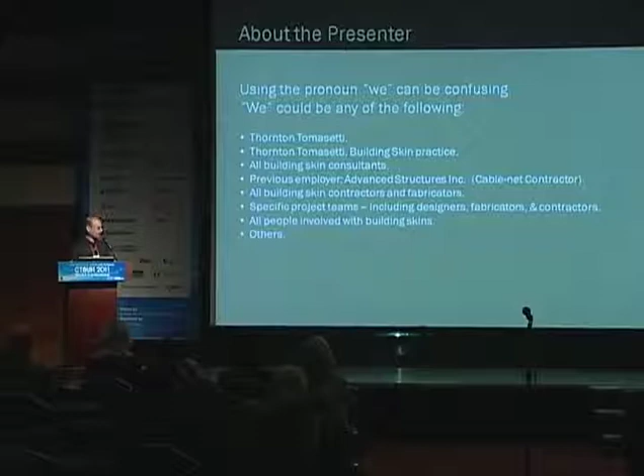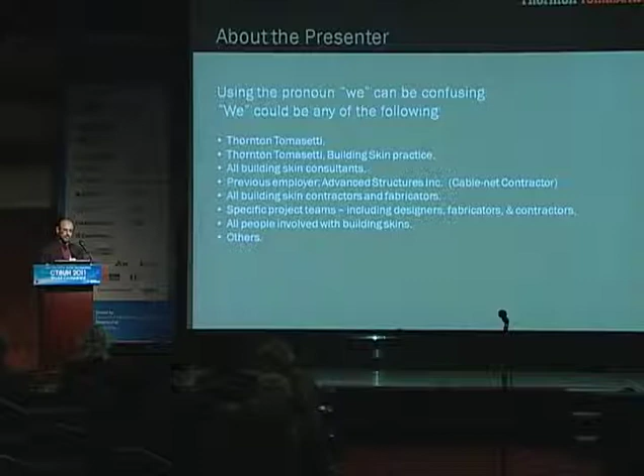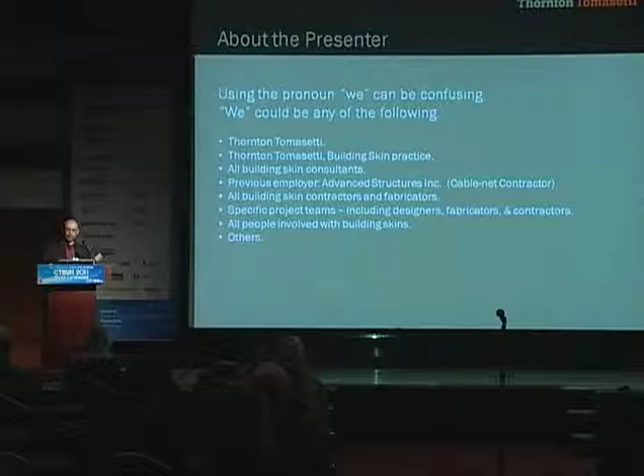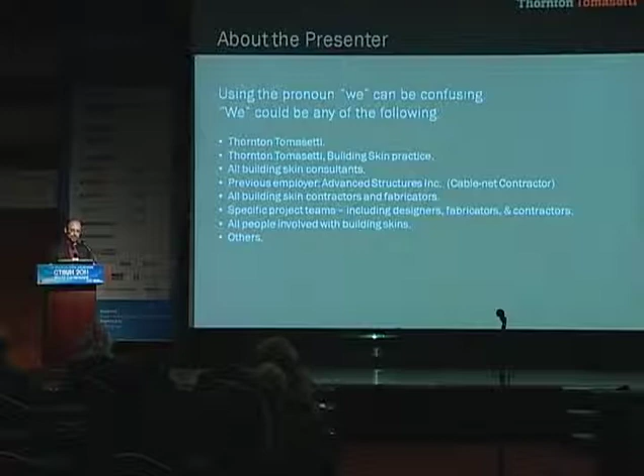Whenever I present, I have a problem with the pronoun 'we.' I say we all the time, but we could be anything. It could be Thornton Tomasetti, as I'm an employee of TT now. It could be the building skin practice within Thornton Tomasetti. It could be my previous employer, ASI, which was a contractor, because much of what I show is from my work as a contractor, especially when I talk about cable nets. Or it could be the specific project teams. If I'm talking about the Loyola project, I could be talking about SCB architects together with the consultants and myself. Or it could just be talking about the building industry as far as the consulting industry for facades. It could be any of those. So I try to be specific when I can, but it's a big group, and I identify with all of those groups.

This is not specifically about Thornton Tomasetti projects. This is about the topic of building skins, which are supported by cables. So I'll be showing jobs that I completed while I was with ASI as a design-build contractor. The 3 buildings are the Qualcomm building by Delawie Wilkes Rodrigues, and Barker; the museum by Polshek; and finally the Loyola University job by Solomon, Cordwell, and Buenz.

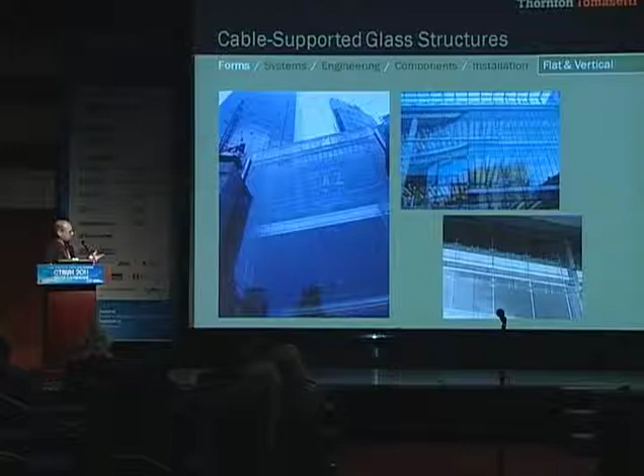Okay, so forms that are available. You can do them flat and vertical, it's nice and simple. Or you can do them flat and sloped, but flat and sloped you would think is the same, but it's not. I'm not used to using a microphone because I need to stand in front of you, so I'm going to shout a little bit.

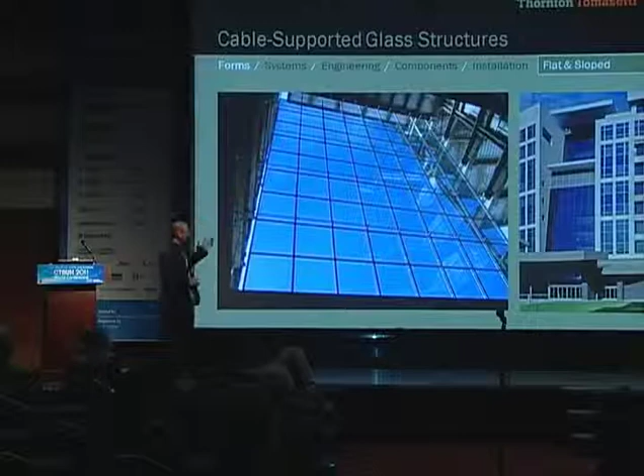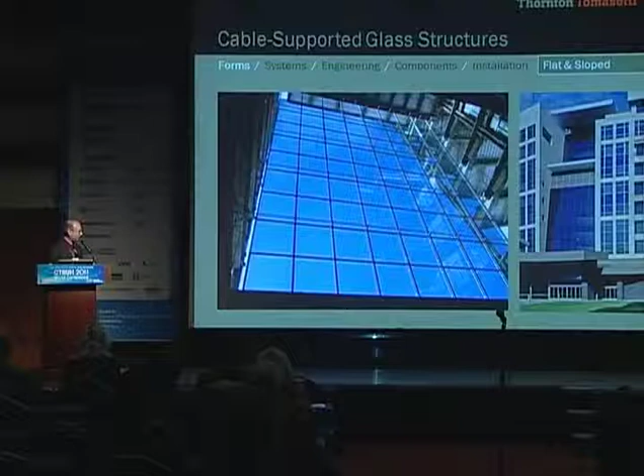When you have a flat building, a flat facade hung with cables, it just wants to hang straight. But as soon as you want to slope it and lean it back, now it wants to hang like a wet towel, so the middle wants to sag. So when you work with these kind of systems, you have to engineer and detail in a series of props so that all of the points actually push the glass out into a spherical pattern. But when you add the glass weight on, it actually deflects back into being a flat form again. So this is a lot more complicated than it looks.

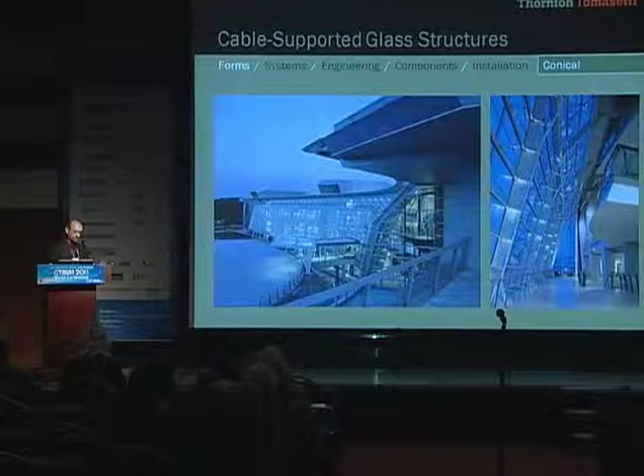You can also do cylindrical shapes, whether you're putting the framing to the inside or to the outside. Again, you can do conical shapes, which are sloped cylinders, and again you have the same problem of the wet towel, so you have to prop everything forward again. And then you can do dome shapes, hemispheres. Hemispheres aren't always hemispheres—sometimes spherical forms are just kind of a lens, which may just be the top of a hemisphere.

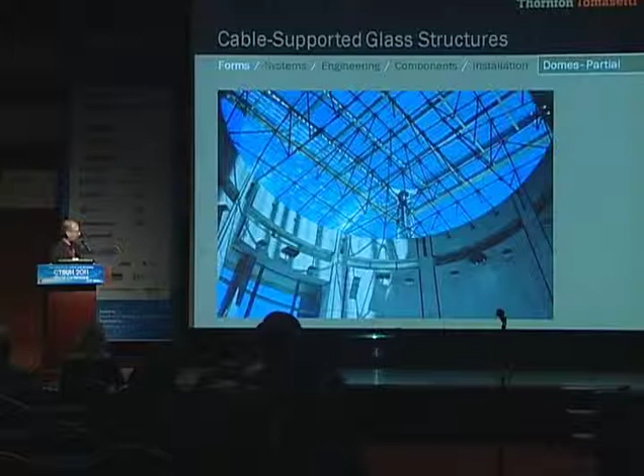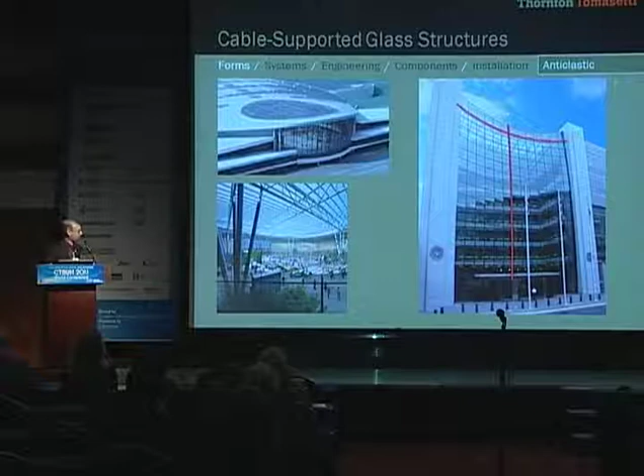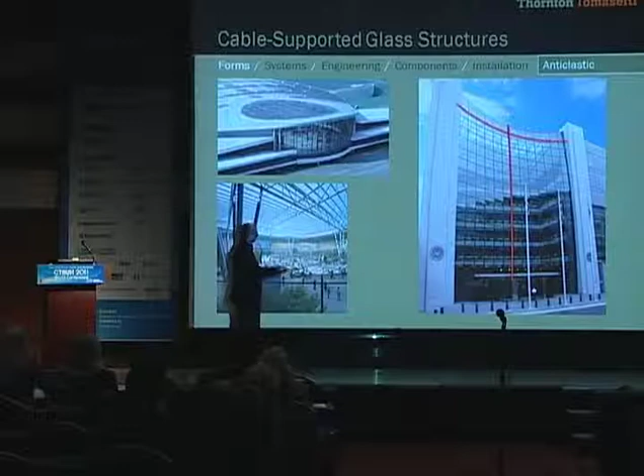Lastly, we have something called anti-clastic. Anti-clastic is not the opposite of clastic - it's the opposite of something called synclastic. What it means is that the curves that generate the form have their radius on opposing sides of the form. So if we look at the horizontal curve here, it's concave, facing out towards all of you. But the vertical curve is convex, facing back into the building. So the form is generated by two sets of curves, but from opposing sides of the form.

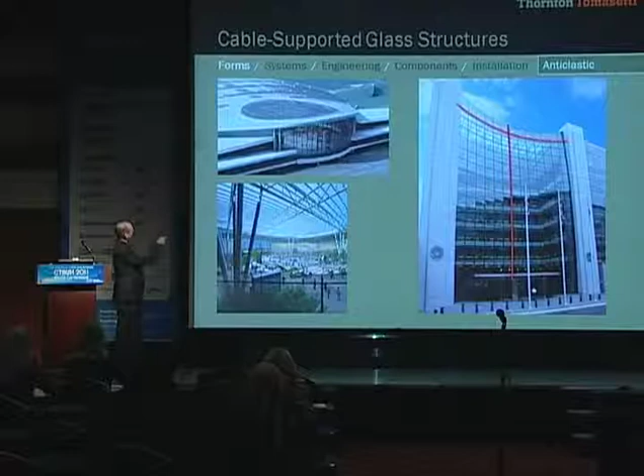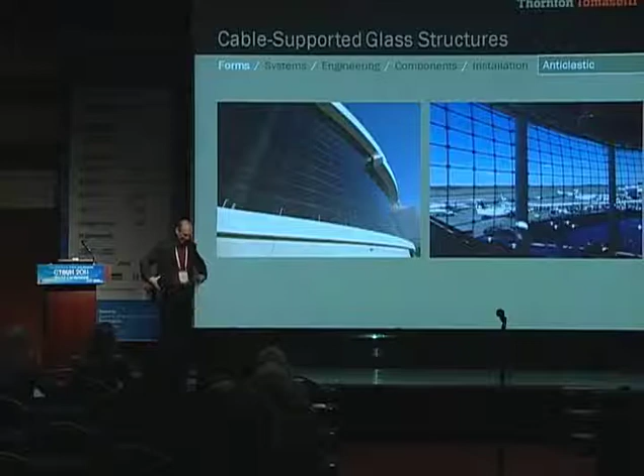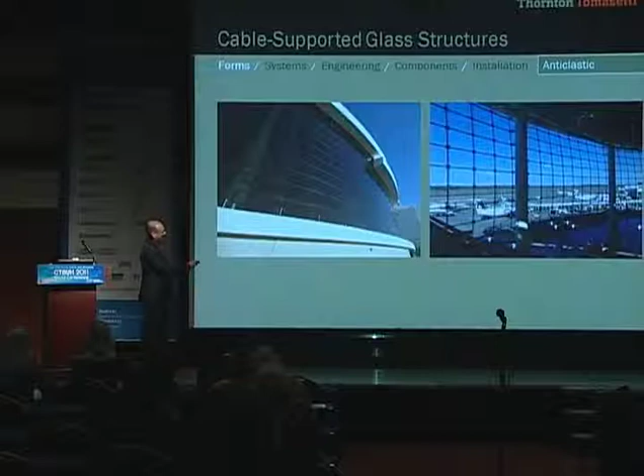This is a fantastic example, SeaTac Airport, of an anti-clastic wall. It's basically just a cylinder form, with a series of cables running horizontally. When you pull those horizontal cables, it's like putting on a girdle - you start vertical and flat, but when you pull them tight, it pulls in the middle, creating this anti-clastic form. So this is generated by two cables pulling against each other. The horizontal cables pull around the curved building, and the vertical cables want to take a straight line, but because of the horizontal cables, they actually pull in.

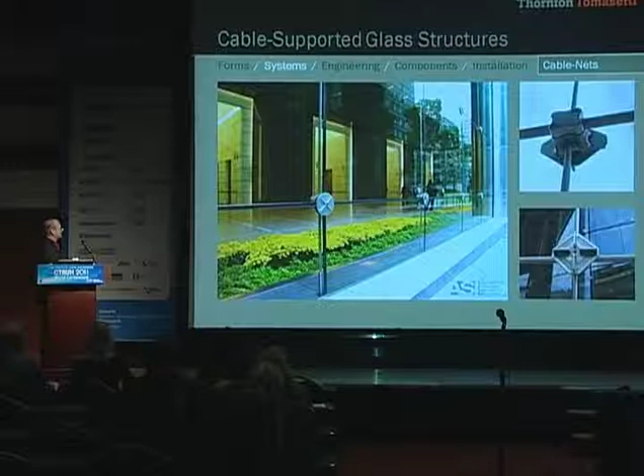Okay, so now let's talk about systems. We have cable nets, and this is actually a cable net - I only refer to these as cable nets. This means we've got two sets of cables, one running horizontal, one running vertical. It's a true net, if you will.

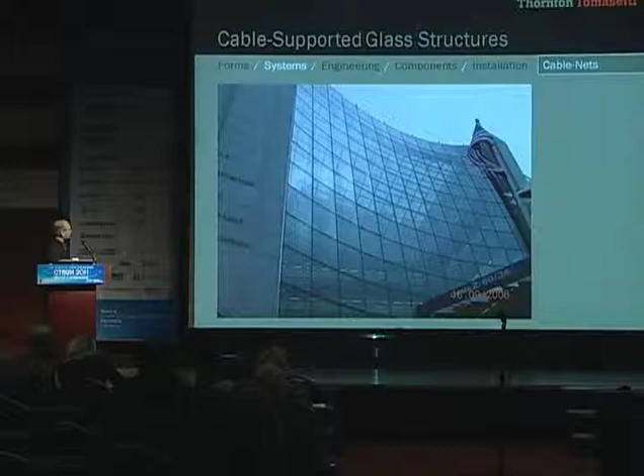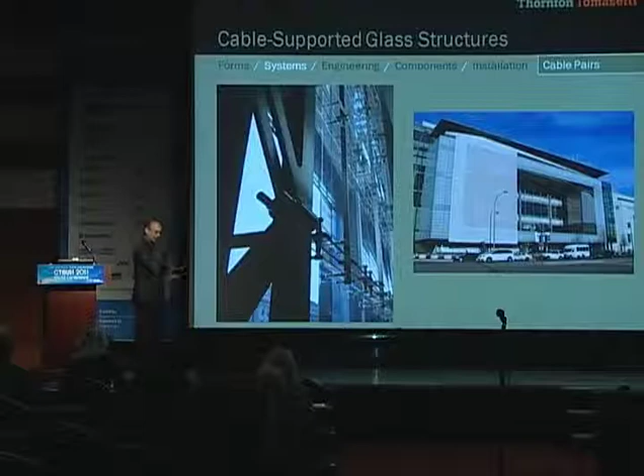You can do anti-clastic forms with cable nets. This has two cables running both directions - this is pairs of cables, though, so I don't call this a cable net. You can see pairs of cables running horizontally, and then stainless steel hanger bars which take the dead load of the system. It's very similar to a cable net, because if it was one, we'd have a vertical cable and a horizontal one. But since we lost that vertical cable acting in tension, we had to turn it horizontal and add it here, because we still have the same structural requirements - we still need the same amount of tension in the system.

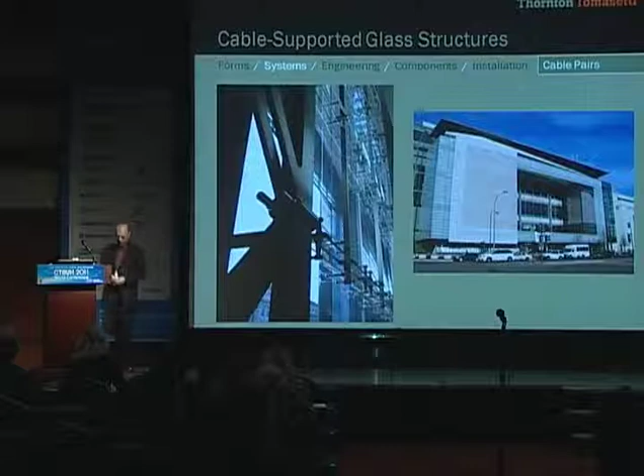Another example of horizontal cable pairs, again with a steel system being the suspension or support for dead load.

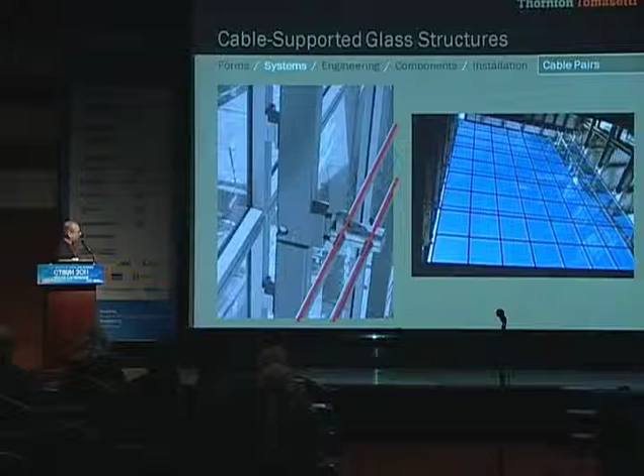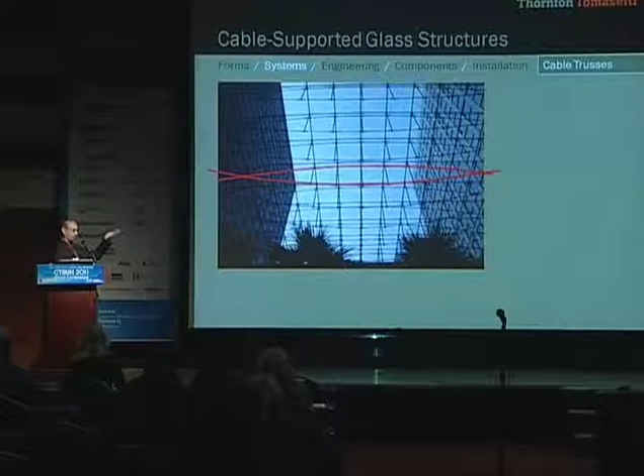So the next system would be cable trusses. Cable trusses have cables which basically oppose each other. This is very similar to the anti-clastic cable net, where you've got one set of cables pulling down on the skylight, and another set pulling up on the skylight. They resist each other, and they resist positive and negative wind loads.

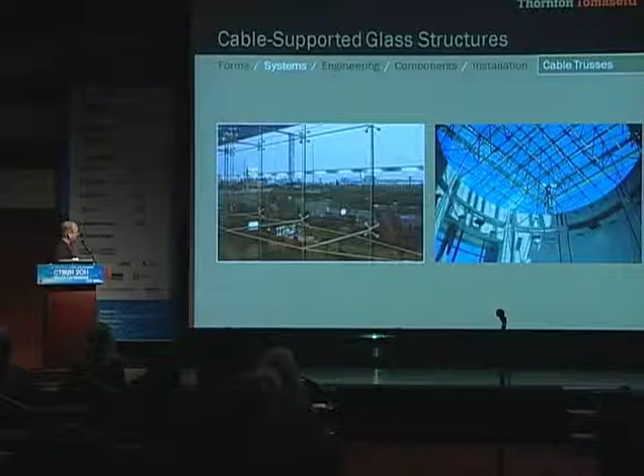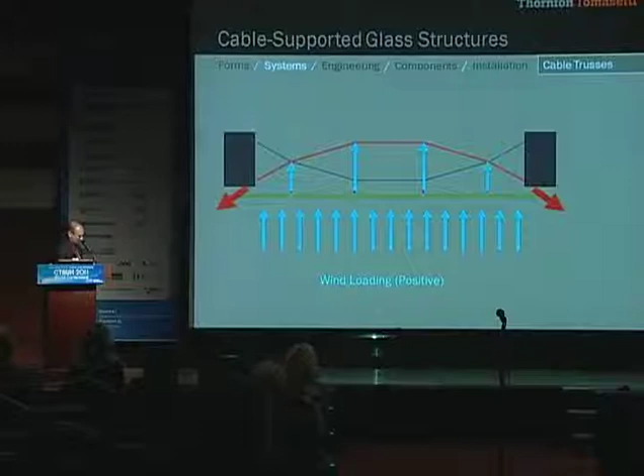These are more cable trusses. There you can see the horizontal cable truss, and these are the struts used to keep those cables opposing each other. So this is a cable truss in plan view, maybe. The way they work is you tension the ends, and that puts the cables in tension - they remain pre-tensioned like that for the life of the job. Now we apply wind load, and it transfers through the front struts, applying it to the back cable. But if we apply negative wind load, it works the opposite - now it's pulling on the back cable or front cable, depending how you look at it.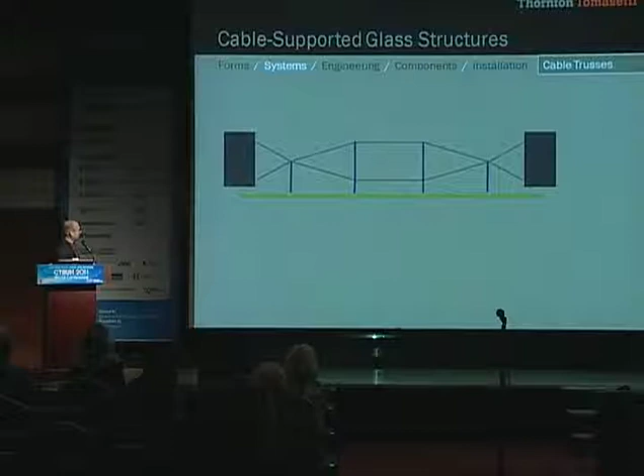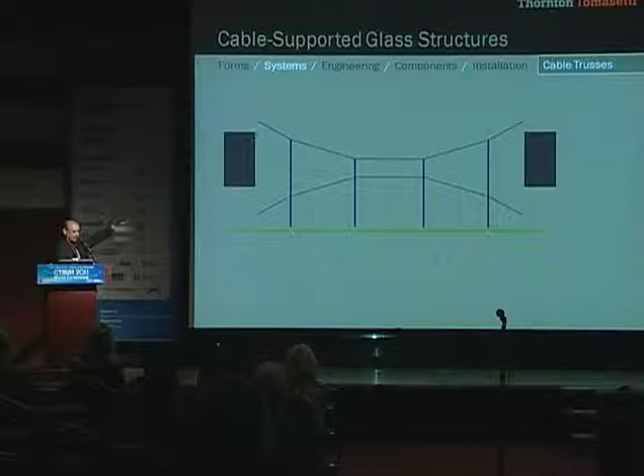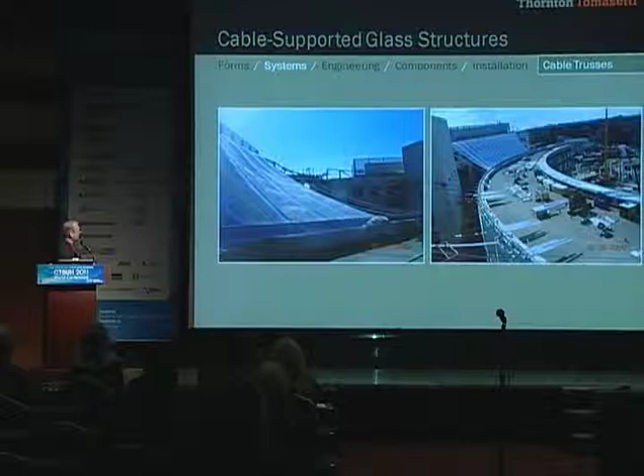As an option, you can pull those two cables apart - they're still the same diagram. Or you can move them to the back, and again it's still the same diagram - you've just moved the positions of the cables. The loading still works the same. Except here, I'm now attached to the columns, so it's an obvious problem, right? This is a job where we're supporting ETFE with cables.

So what I've drawn in, you can see the cables running back here. They look like they're just sagging from self-weight, but actually what you don't see is there's another cable below them that's pulling the system down and keeping it tight and rigid.

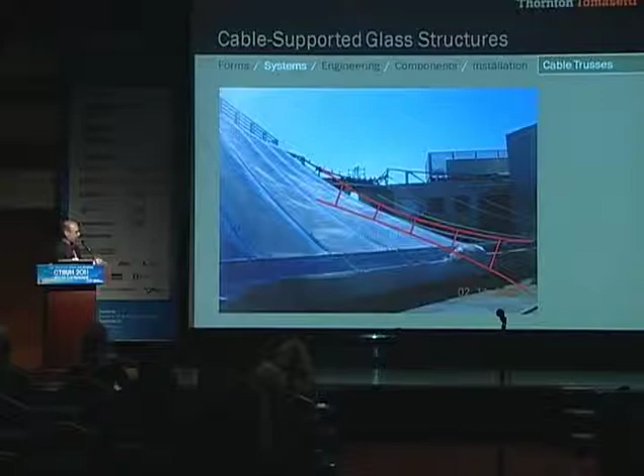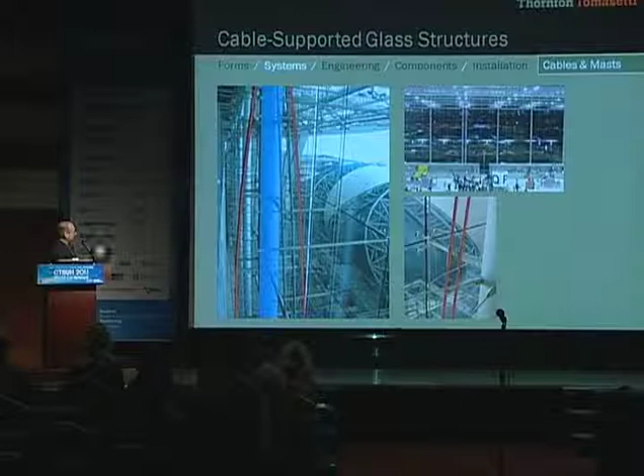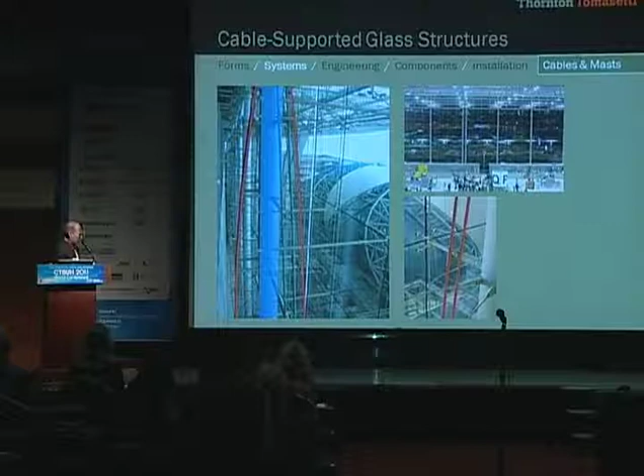This is Bangkok International Airport. This is a mast system where we basically have a compression mast which goes down the middle of the system, and then we have a cable in the front and a cable in the back, doing the same thing as the cable truss, except instead of pulling on the structure itself - the columns at each end - we're putting all this load into this compression strut. So we're isolating all of the cable loads to go up to the top and then come all the way back down through the compression strut again. It's kind of a self-contained tension system. But if you look carefully, we also have tension trusses in here as well, going side to side.

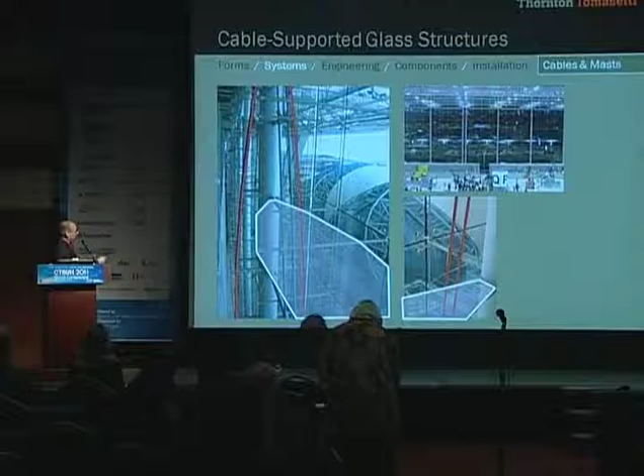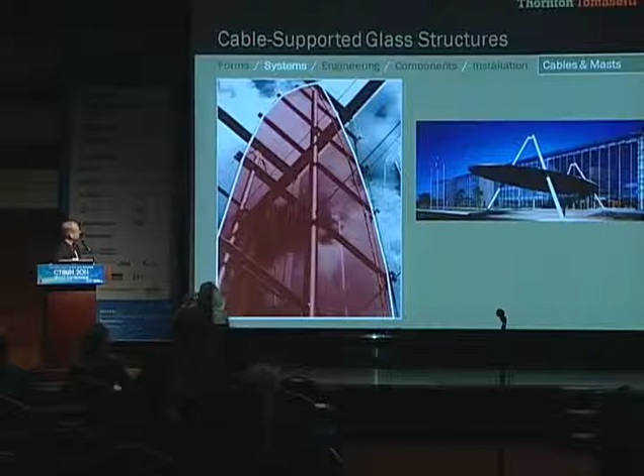This was a hybrid system I developed for a project in California. Basically, we have a series of vertical masts, but they only have the rear cable. So what do we do about the front cable that's missing? There should be a front cable putting load from the outside to keep the system balanced.

Since it's already a curved facade, we use the horizontal cables that run directly behind the glass and tension them from each end. That helps pull in the facade, whereas the vertical cables are pushing out. So it's a hybrid system, with the horizontal cables being activated to resist the vertical cables.

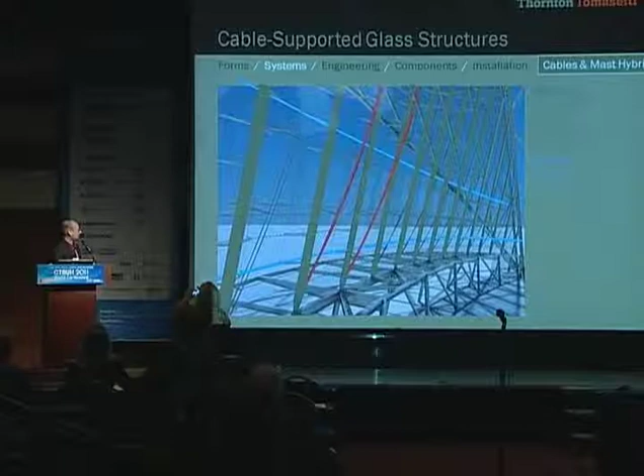Okay, let's talk about engineering and some of the boundary conditions we need. There's a lot of load in these, and I meant to print myself a cheat sheet so I could tell you how much load, because I don't keep this in my head.

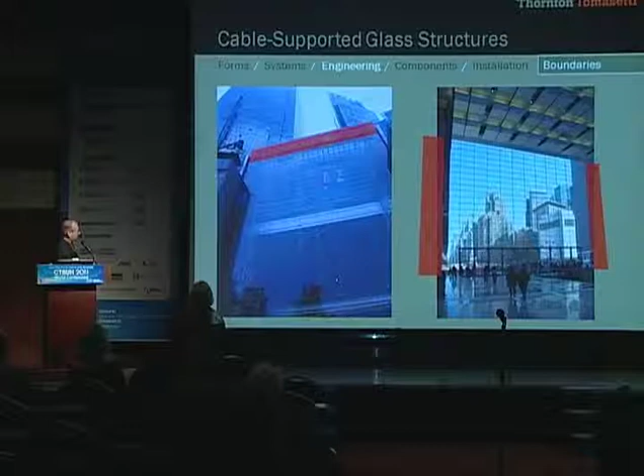Maybe 30,000 pounds would be common to have in these cables for pretension. So what do we need? You need a very big truss up here at the top to take the tension load of these vertical cables, and you also need concrete piers or concrete decks on the left and right to take the horizontal loads. This is that vertical truss at the top, which isn't doing anything other than just taking those cable loads.

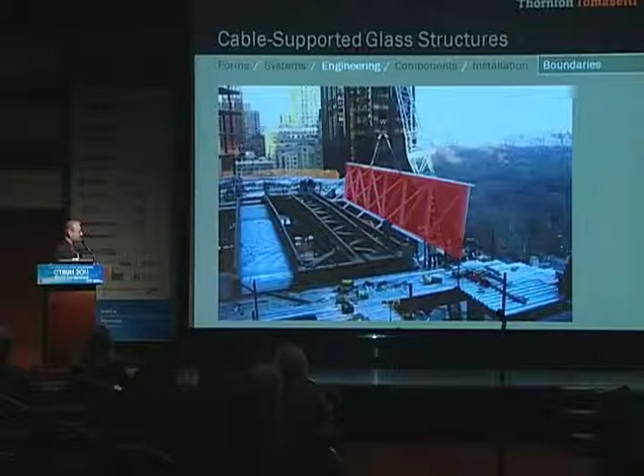Frequently we're asked to do cable structures where there's really no provision of structure. And we have to tell the designers or the clients, look, I'm sorry, the way the building is right now, you really don't have the capacity to take the cable loads.

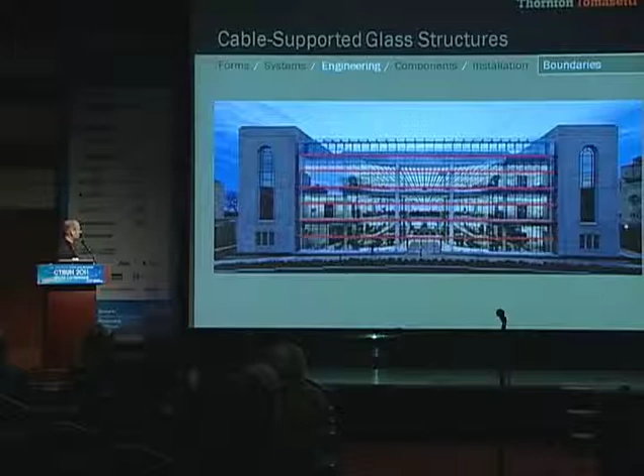This is one of the three jobs that I actually built as a contractor. This is where the horizontal cables are located, and that's what's resisting the cable loads. We have massive concrete piers at the left and right ends of the building, giant bookends.

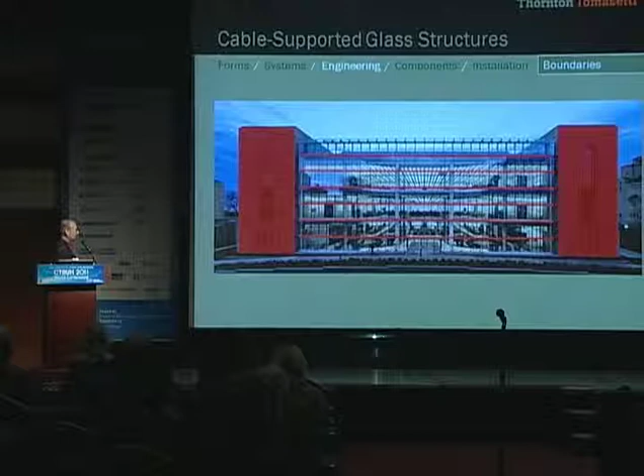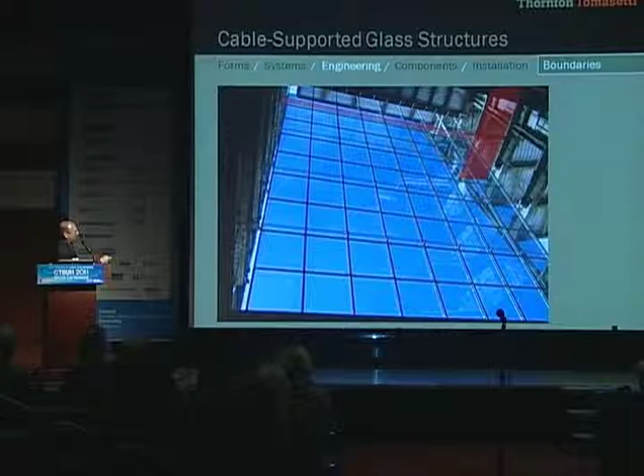This top set of cables comes all the way across and ties right into a floor deck. If you look carefully, you can see the drag beam, which is actually pulling this force and dispersing it back into the building. If we keep going floor by floor, you realize all of the cables are tied into the floor decks, and the floor decks act as diaphragms to carry these loads back into the building.

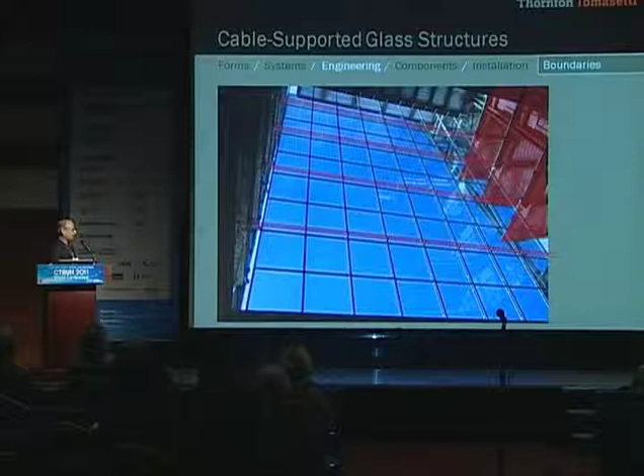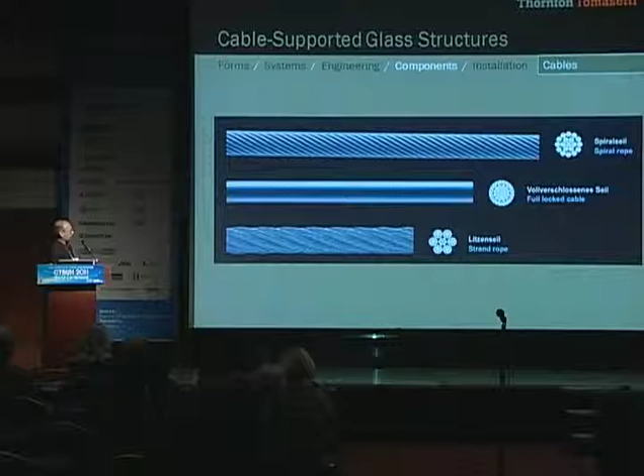Mostly for the jobs that we do, we're either using strand or the fully locked cable. Fully locked cable is a lot more expensive, so we tend not to use that. So usually we're doing this - this is what it looks like when it's in a box. It looks like spaghetti laying in a box.

If we back up for a second, this end fitting here is called a swaged fitting. There's a series of tapped threads here that are cut, and then we've got the basic swage, which this rope or strand cable comes inside.

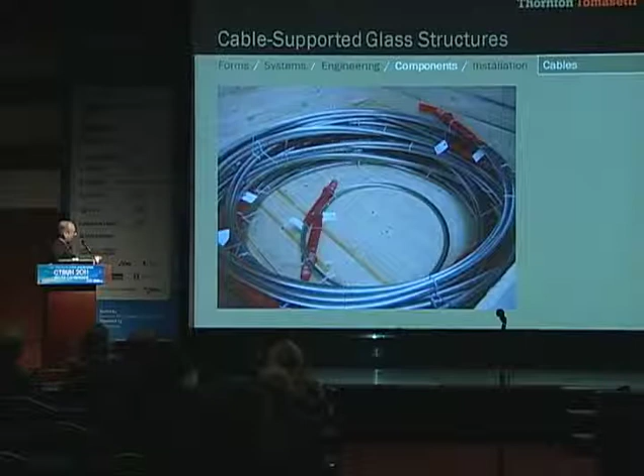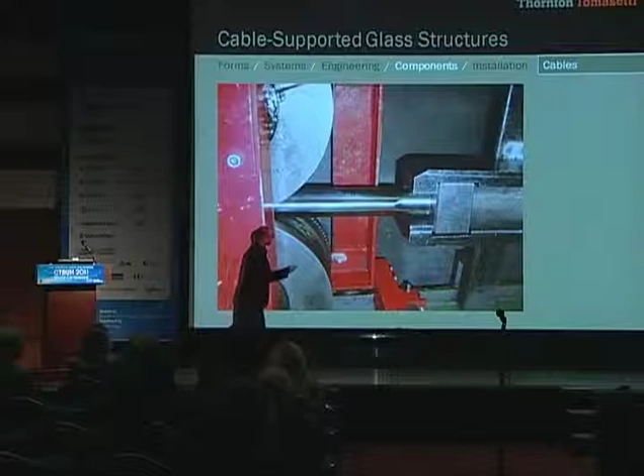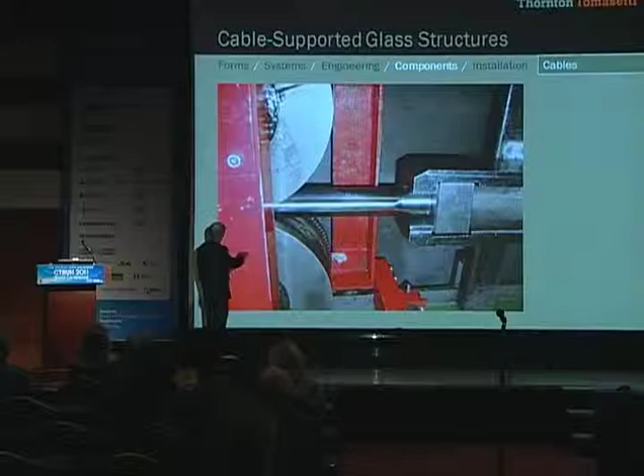So the way this works is the threaded portion is here. It's tapped into a solid block, and from the left side that we can't see over here, we've got the cable, and we bring this cable and we drop it into this hollow sleeve, if you will. But then this wheel here and this wheel down below, these are very large hydraulic rams, which basically press together on this hollow tube, and then by grabbing it here, they actually pull the hollow tube through the rollers.

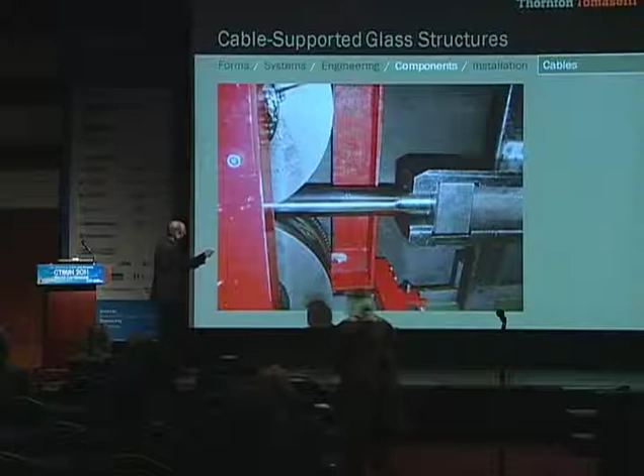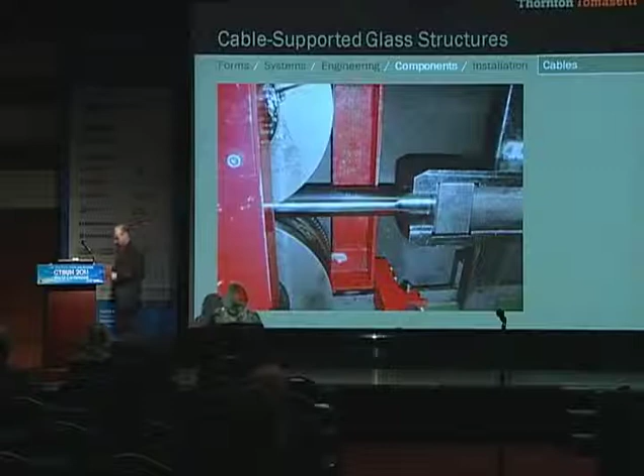And you can see the deformation of the stainless steel sleeve here. So basically what's happening is they're just taking this hollow sleeve and squeezing it onto the strand rope. That's important from an engineering standpoint, to know that you're dealing with something that's been squeezed onto the rope, because basically the failure mechanism for those kind of fittings means that the rope will actually pull out of that sleeve before the rope itself will fail. So there's always a 0.9 factor whenever you're using those kind of end fittings. Those are called swage fittings.

So they differ from something like a spelter socket. A spelter socket is shaped like a funnel. You put the cable through, then you pull it apart, and then you put grout inside, and then it cannot pull back through the funnel-shaped fitting.

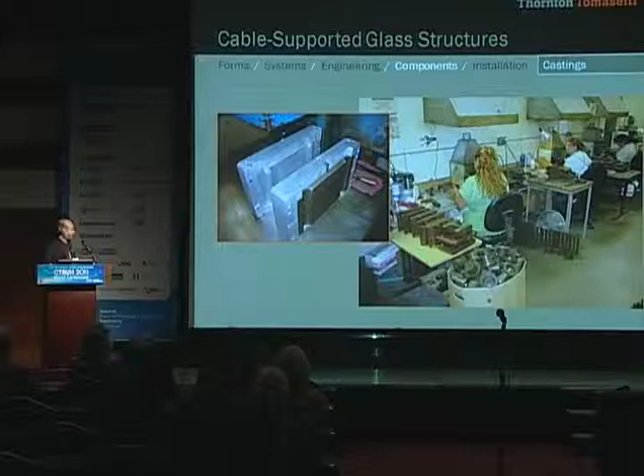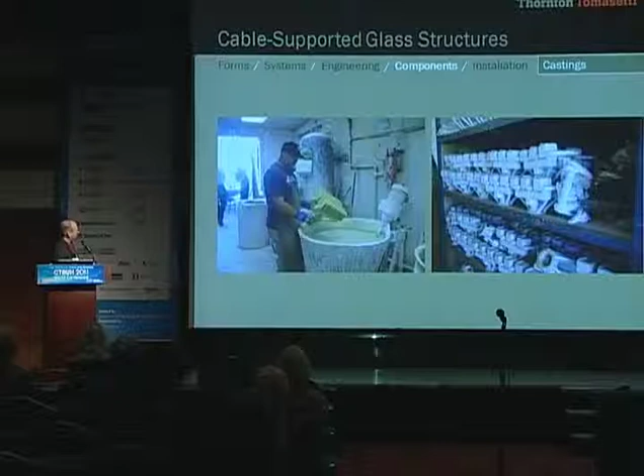Whenever we do cable systems, we almost always have castings. These are called investment castings. Basically what we do is we have a die form that we inject wax into, and for every casting that we need on the job, we have to make one piece of wax. So what we've made here is a clamp. Using these two die forms together, we injected this wax in there to create this one clamp shape. But you can see this little nib here. This is where the wax was coming in.

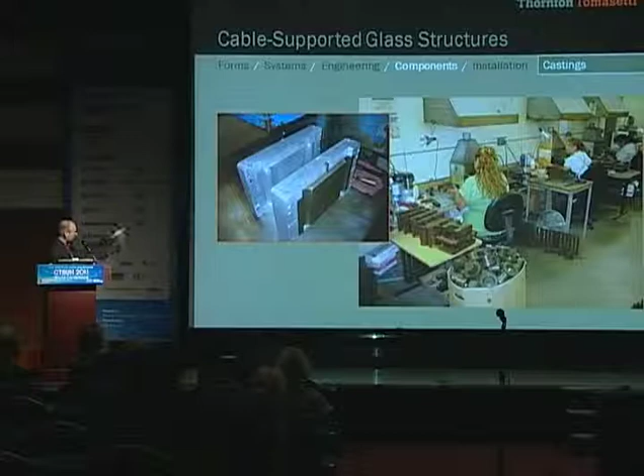So now all of these ladies here are basically taking this piece, cutting off the injection point, and then they're actually tapping on these other pieces which create the flow tunnels for the stainless steel to enter into the hollow void later. So we start with a solid wax, and then they dip that solid wax into powder, which is basically ceramic dust. And you can see here, these are castings that have been coated with the powder dust. They've been coated many, many times. They have a thick layer on them.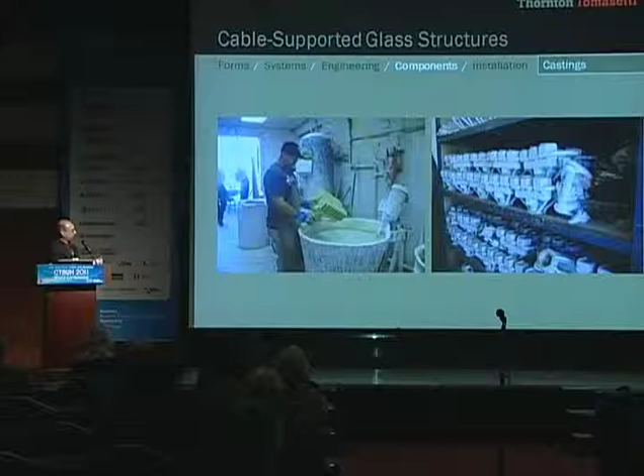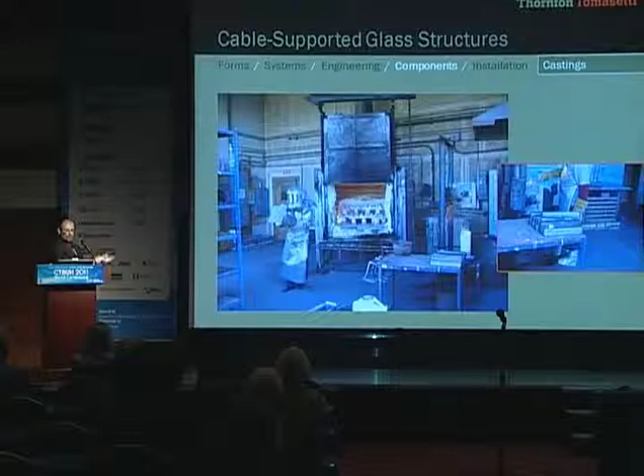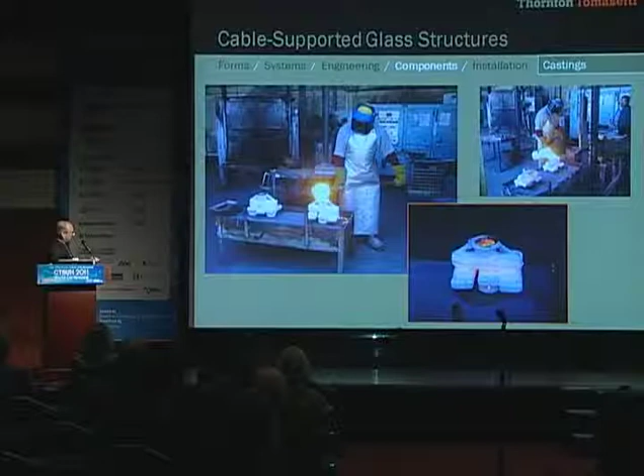So that's ceramic. And then basically, we take that ceramic and we put it into an oven and we fire it. And so now it becomes a ceramic shell, and all of the wax is drained out because it was hot. So now we take that ceramic shell and we pour stainless steel back into it, and these are the castings that were actually made for that Qualcomm project.

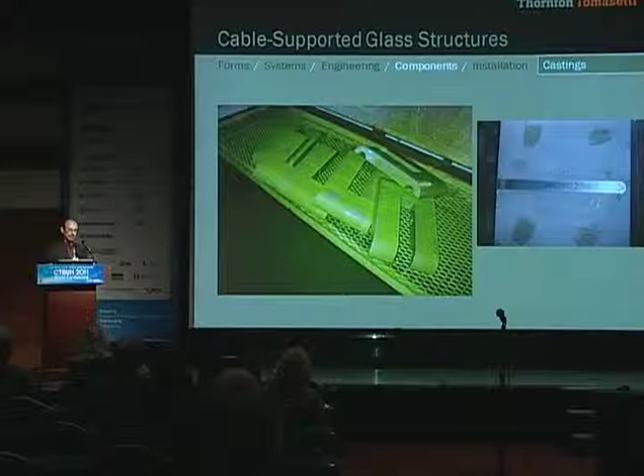Then we have to take them through a non-destructive testing process. Here, unfortunately, you can see the word rejected underneath the ruler, and this is why it's rejected. All of these stains are residual dye, which is residing in some kind of crevices and cracks within the die. So now they have to send these back. They have to drill out the defects. Then they have to weld in stainless steel material. They have to regrind it. They have to re-sandblast it, and then take it back to NDT testing again. It's a very long, arduous process to deal with castings.

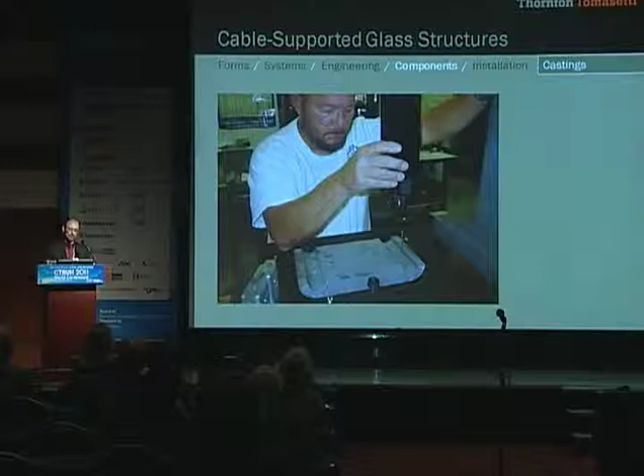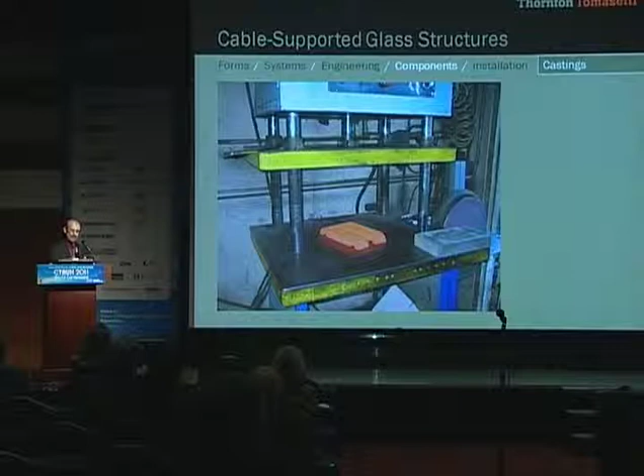Then once you've got that, you've got to machine them. This guy is checking for the precision of the casting so he can put it in his CNC equipment. Once he gets it in the CNC equipment, if it doesn't register properly, he can't drill on it properly. So if they don't register properly, then we have to send them back out before he machines them. We have to reheat them, and then we take a hydraulic press here and we ram it down and flatten the casting so it's not warped. So then he can work on them again. That's what it's supposed to look like when we're finished.

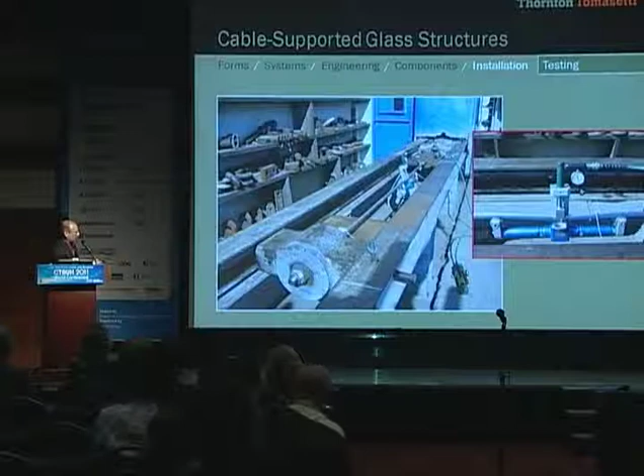This is the testing I was talking about with the short cable piece. We actually use this to calibrate this equipment, which we use on site for checking our tensions. It's called a tension meter. So we first pull it to the correct load. We calibrate this tension meter so we can use it on site. Then we remove the tension meter, and then we go ahead and pull the cable until it breaks, and we verify what load it actually broke at in order to confirm our engineering.

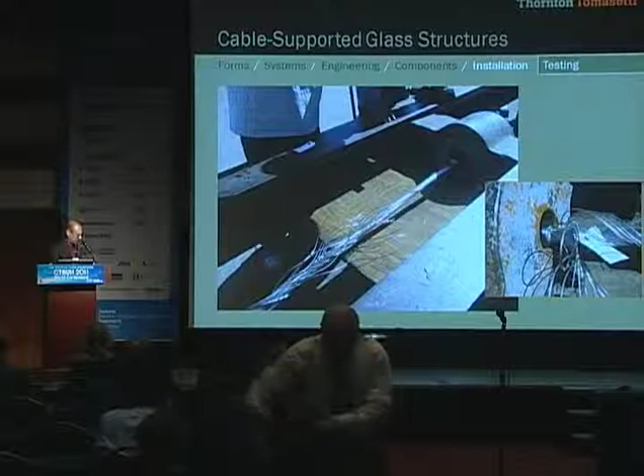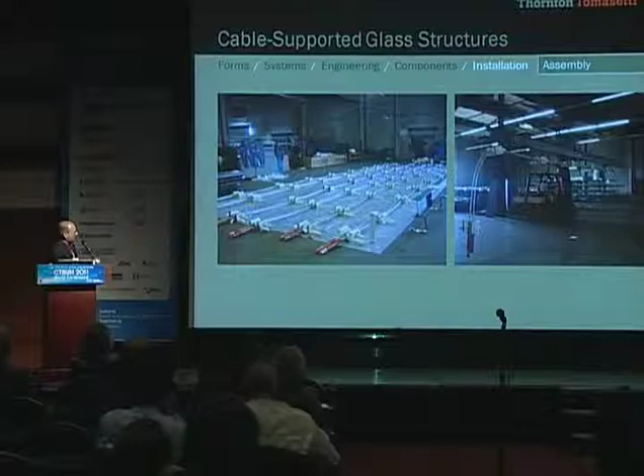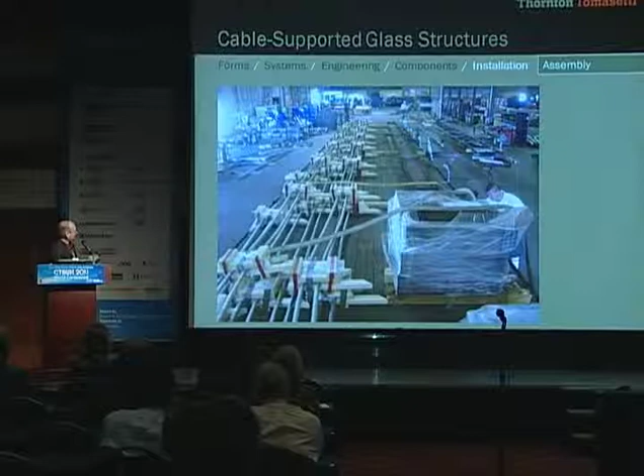Then sometimes there's pre-assembly in the shop where we actually pull sets of cables together and we preload the clamps. We actually design the spreader bars here for lifting the clamps, and this spreader bar will actually be sent to the site in order to install. This is us putting it on the truck. Here's the spreader bar I was talking about. Here's the compressors. Here's the spreader bar again being used on site in order to lift the cables.

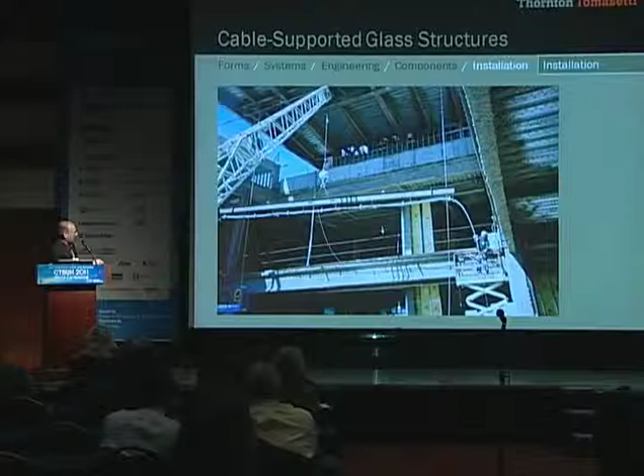These are the cables here. You can see the guy's got a pair of cables which he's going to load into the floor deck here. This is him loading it into the floor deck and trying to make the connections. And then finally doing the jacking equipment. These are called jacking chairs, which we design as well. Attaching the hydraulics.

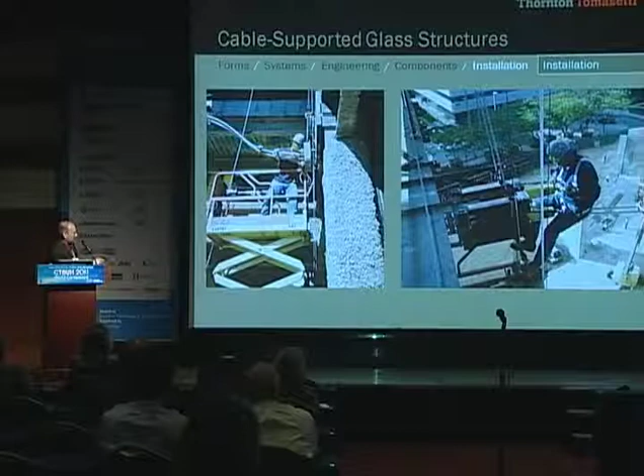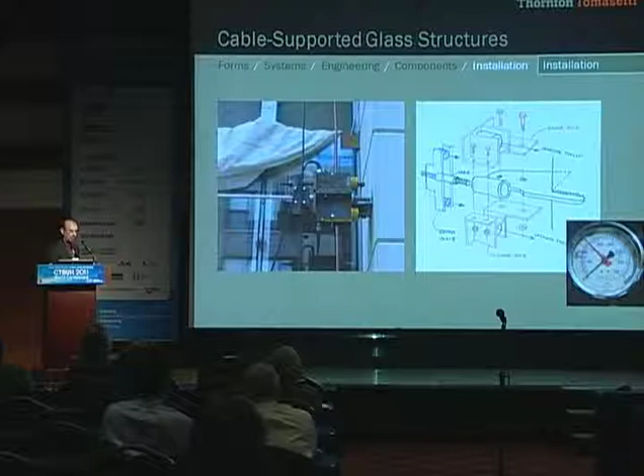In this case, the entire cable net was pre-assembled and then hung like a big drape. Here you can see a big spreader bar at the top. Some more samples of jacking equipment that we have to design and engineer as part of our design process. And then this is the finished wall for one of them.

Mark, would you finalize your presentation? This is done. Okay. Thank you. Thank you, Mark. If you just wait there, if you wouldn't mind, for questions. That was incredibly informative. I now know what anti-clastic means, and that was very, very useful. Have we got any questions for Mark, please? Because if we haven't, I've certainly got one or two. Anyone? Okay, well, I'm going to kick off.

I've actually got a couple of questions, Mark, and your answer might well be related to both of them. I just wondered, as a designer, what gives you the biggest headache? And also, what are the situations and areas that these sort of systems are being used in now that perhaps wasn't the case 2 or 3 years ago?

Yeah, so actually, that was one of the reasons that I proposed this talk for CTBUH. I've been working on several high-rises recently where people have been trying to propose cable net systems quite high up on the building. And the difficulty is in trying to get the structural provision that can resist the cable loads that we need. Especially in a place like Shenzhen or Hong Kong where the wind loads are extremely high, the amount of pretension that we need in the cables is just enormous.

The higher up in the building we go, the higher the loads go, but also typically the less structure that we have from the building in order to tie into. So that's certainly one of the points of the lecture, to try to emphasize that idea of needing those structural provisions.

Okay, any more questions? Yes? Bill. Just wondering about the installation. Do you find it challenging to find good installers of these systems since they're so unique and specialized? Yeah, it's a good question. I mean, while I was doing these jobs, I was actually the contractor, part of the contracting team. And we installed them with typical steel workers in the US. But that team that we used actually had prior experience with doing some cables. So the important thing was really having our design and engineering support on site.